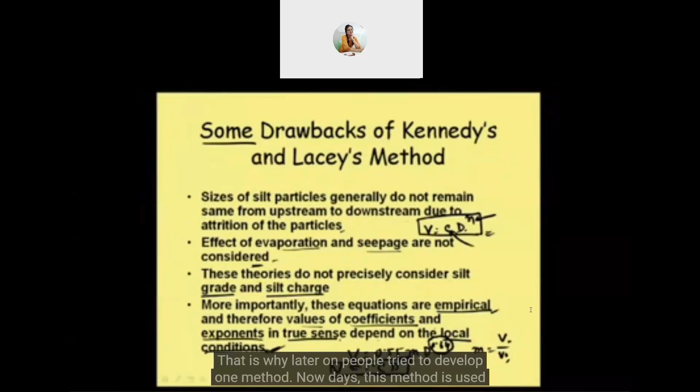Analytical basis is not there, and that's why later on people tried to develop one method, and nowadays this method is used for design of alluvial channels. In fact, the Indian code also suggests this method, that is the tractive force method of design of alluvial channel. So after covering Kennedy's and Lacey's theory of design of alluvial channel, now we'll be moving on to design of alluvial channel using the tractive force method.

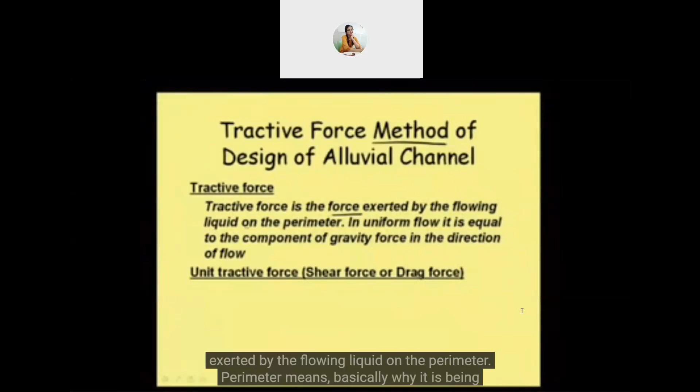Well, now we need to know what is basically tractive force. Tractive force is the force exerted by the flowing liquid on the perimeter. Why am I writing it as perimeter? Because we shouldn't say that it is exerted by the fluid only on the sediment or soil, since sometimes the perimeter may be consisting of something else, but still the flowing fluid will be exerting a force, a drag force, on the side of the channel. And if sediment or soil is there, if it is an unlined canal, that is, an alluvial channel, then the drag force will be exerted on the soil particle. So that is called tractive force.

Now, when a fluid is flowing through a channel, what is that drag force, or where does it come from? That is basically the force that is governing the flow, or the force due to which the fluid is moving. And that is nothing but the component of gravity force acting in the direction of flow. So we can say that in uniform flow, it is equal to the component of gravity force in the direction of flow. So that is what tractive force is.

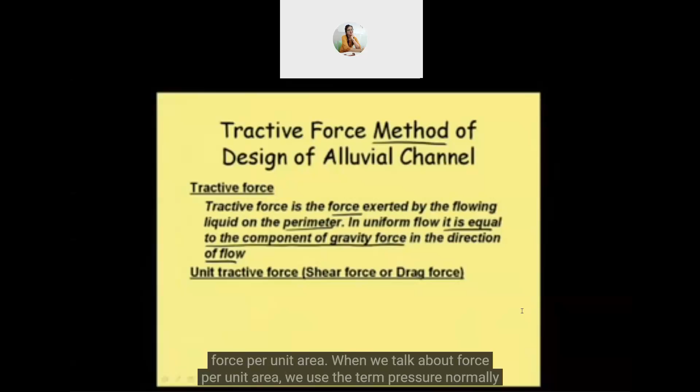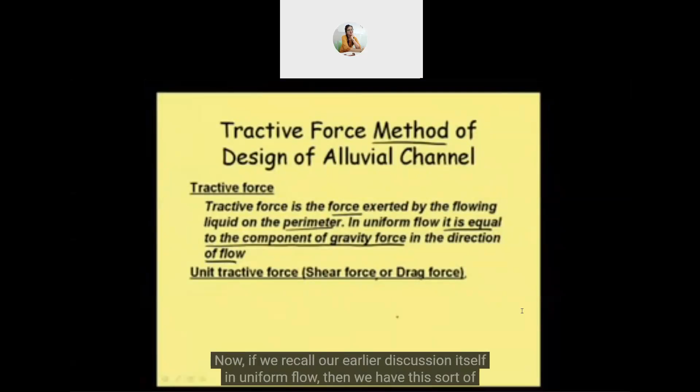But for the design purpose, or for developing the concept of design of alluvial channel by tractive force, we need to know about another term called unit tractive force, which is also called shear force or drag force. Unit tractive force means tractive force per unit area. When we talk about force per unit area, we normally use the term pressure, or stress. But in case of tractive force, the popular term used is unit tractive force, and of course we can call it shear force, or we can call it drag force also.

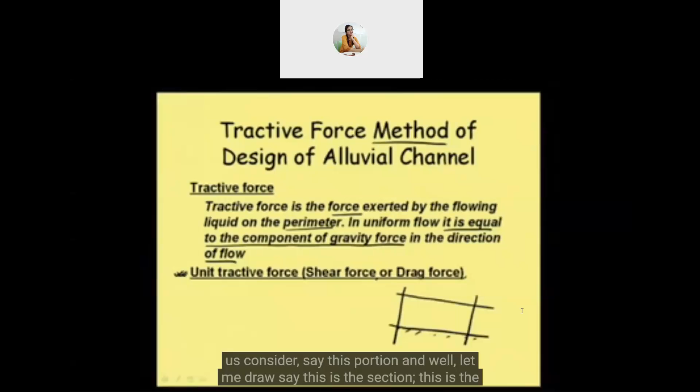Now, if we recall our earlier discussion in uniform flow, we had this sort of analysis. Say in a channel, this is the bed, and water is flowing, and let us consider this portion. Let me draw this section, and then this section, and the sectional area is this area. We are considering uniform flow, so wherever we take the section, it doesn't matter, but if the channel is non-prismatic, it is better to take the section from the central part, so that it represents both sides in a well-represented way.

Now, say this is area and this is the perimeter, the entire side length. This is the perimeter. And say the weight of this fluid is W. W means the total weight, and the unit weight of the fluid, if I write as small w, sometimes we use the term gamma also, to represent unit weight. In different books, different symbols are used, we should not get confused by these symbols; we should know the physical meaning of it. So it is the unit weight of water, and then unit weight multiplied by the volume of this fluid.

We are talking about the fluid volume between section 1 and 2. What is this volume of fluid? If the area is A, and the length of this portion is L, then the volume will be A multiplied by length, A multiplied by L. This is what gives the weight.

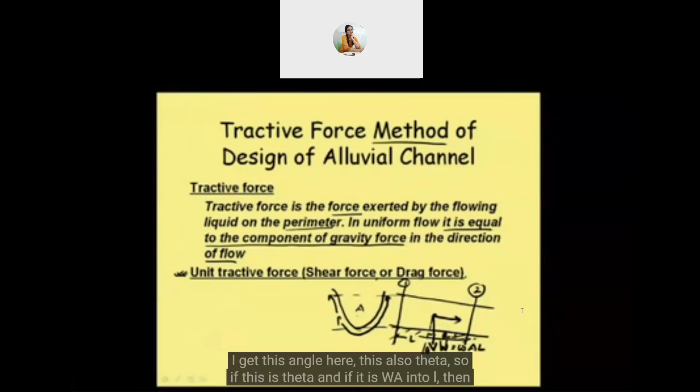So if this angle is theta and the weight is WAL, this force will be, because the flow movement is in this direction, equal to WAL into sine theta, WAL sine theta.

Now for very small values of theta, generally in canal systems in agricultural fields, when we design, these are normally not having very steep slope when we talk about plain area. The theta, because this slope always remains generally small, since we are doing this for design of alluvial channels. In alluvial channels, normally in the river valley, the slope will not be very high. But if we talk about agriculture in hills, that soil will not be alluvial, and we are not talking about design of this sort of canal there. That design concept will be different, because the soil will not be alluvial at that point.

So for small value of theta, WAL sine theta, we can write sine theta approximately equal to theta. And what is this theta? Theta is nothing but the bed slope S. So if this force is written as F, we get F equals WAL into S.

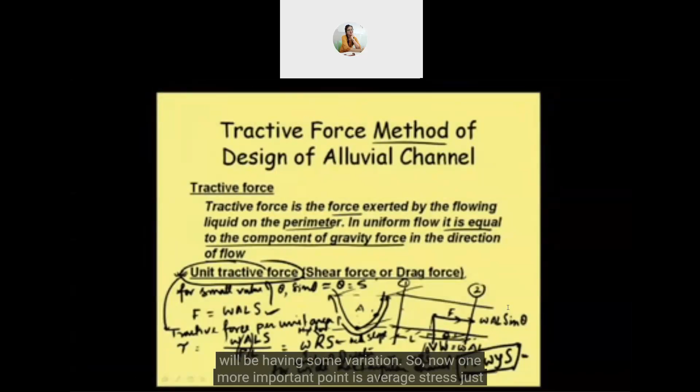Average shear stress is what we calculate, but for design purposes we should know the distribution of this shear stress, whether it is uniformly distributed over the surface or distributed in a different way. So we are talking about distribution of shear stress, which means tractive force, and tractive force per unit area, that is unit tractive force.

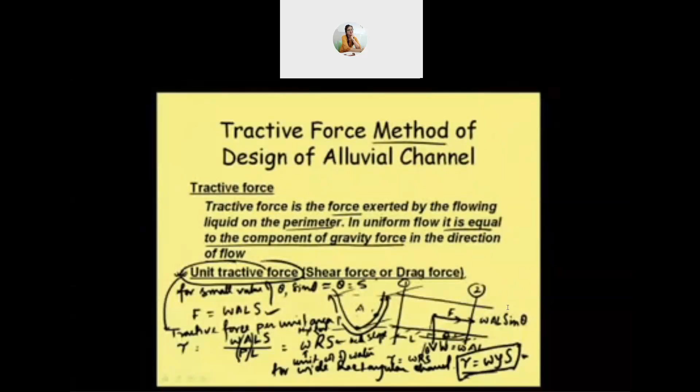So the distribution of tractive force in case of a wide channel is of course uniform. If we have a very wide channel, then using the relation tau equals WYS, we can consider it uniform everywhere.

But generally all channels are not that wide, and wide means how wide — that is the question. How wide the channel is, is obtained from the value of B by Y. For example, if the bed width is 10 meters and the depth is 0.5 meter, that can be considered wide, because B is significantly larger than depth Y. But the same 10 meter wide channel with a depth of 3 or 4 meters cannot be considered wide.

So wide does not necessarily mean only the B value; it basically depends on the B by Y ratio. B should be much larger than Y, sufficiently larger, and only in that case can we consider R equal to Y for a wide rectangular channel. Otherwise not. R, the hydraulic radius, is considered equal to the depth only when B is much larger than Y. So we should be very careful about this.

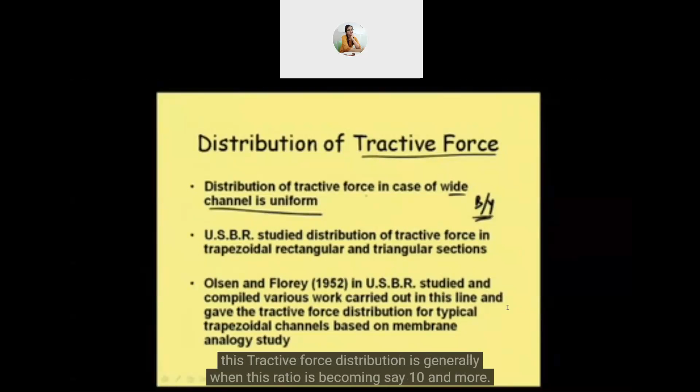If someone asks whether a 20 meter wide channel can be considered a wide rectangular channel, that is not the right question. You should ask whether the B by Y ratio is such that it can be considered a wide rectangular channel. For a wide channel, tractive force distribution is generally uniform when this ratio becomes 10 or more; in that case we can consider the tractive force distribution to be uniform.

Now, the United States Bureau of Reclamation studied the distribution of tractive force in trapezoidal, rectangular, and triangular sections. They conducted a lot of experimental study, since there is no other way to obtain this value than through experimentation. They also conducted some study using numerical techniques, but their basis was experimental, and they carried out many experiments to understand the distribution of this tractive force.

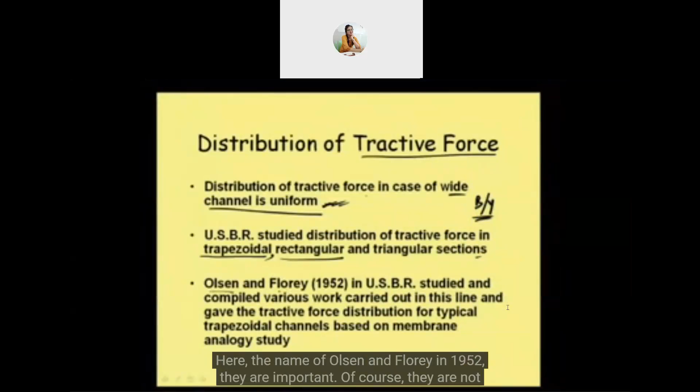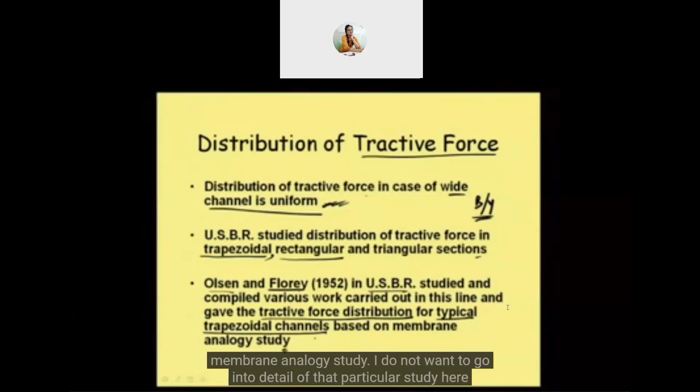The names Olsen and Florey, in 1952, are important here. Of course, they were not alone — other engineers worked along with them, and they compiled their study as well as studies conducted by other people at USBR. They gave the tractive force distribution for typical trapezoidal channels based on a membrane analogy study. I do not want to go into the detail of that study right now, but we need to know that based on their study, they gave a distribution of tractive force.

That distribution means how tractive stress will actually vary along the perimeter. So that distribution they gave, and let us see how this distribution occurred.

They did it for different types of channels, different types of trapezoidal channels. For a trapezoidal channel with side slope 1:1.5, they conducted some experiments. With side slope 1:2, they conducted some experiments. With a rectangular channel, they conducted some experiments. So like that, they conducted several experimentations. And for all those different side slopes, they again considered the B by Y ratio, which is a very important factor as we were discussing.

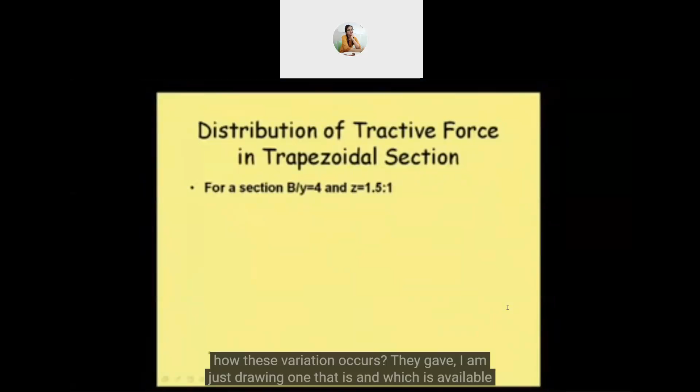So for B by Y ratio say 5, then 10, 6, 7, for different values starting from 1 up to 10, they conducted different experiments and got these values. Let us see how this variation occurs. They gave, and I am just drawing one example that is available in different books also.

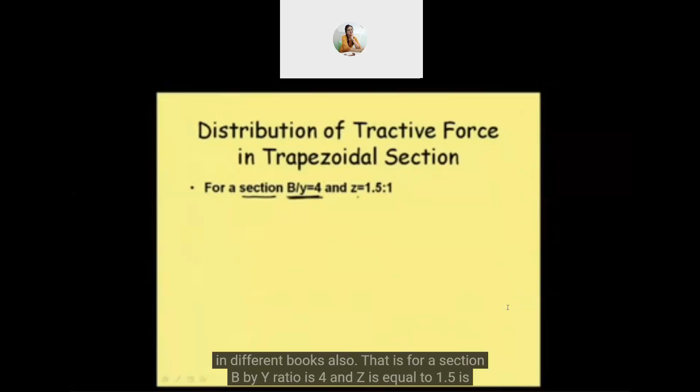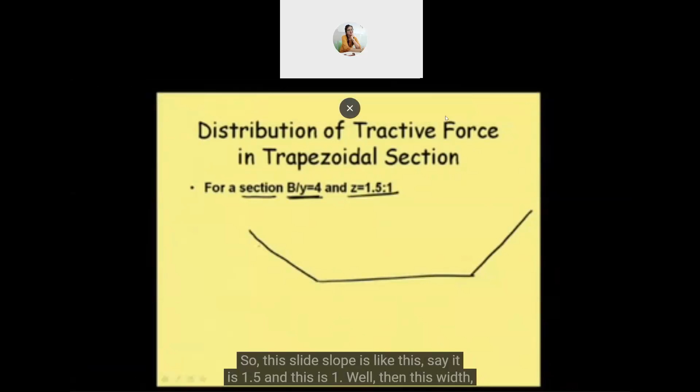That is for a section where B by Y ratio is 4 and Z is equal to 1.5:1, that is 1.5 horizontal to 1 vertical. So if we draw that channel, it is like that, with this side slope being 1.5 and this being 1.

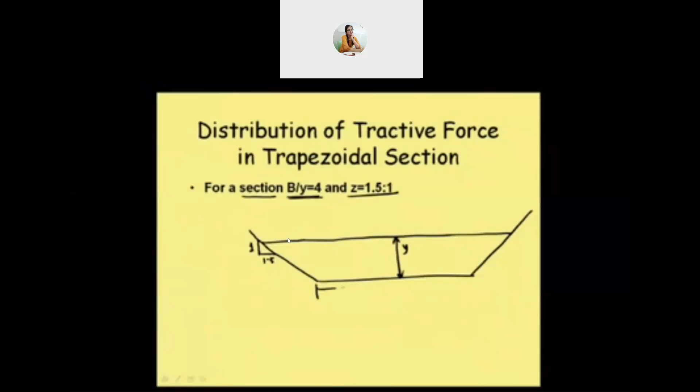If the depth is, suppose, Y, let me take the proportion accordingly since B by Y is 4. So if this depth is y, then width is equal to 4 times y. This is the bed width, and this is nothing but our actual B value. So B is equal to 4y.

So for that particular channel, if we draw the shear stress distribution, we can see that at the bed, the distribution is more or less uniform. It goes like this, more or less uniform. Let me take a different color so that it becomes more distinct. So this is the channel, and the distribution at the bed is more or less uniform.

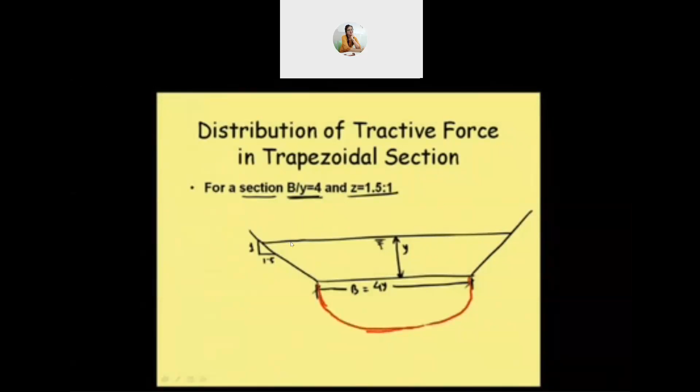And the maximum value of this particular distribution is obtained as 0.970 into WYS. Now what this means is that at every point we have a shear stress value.

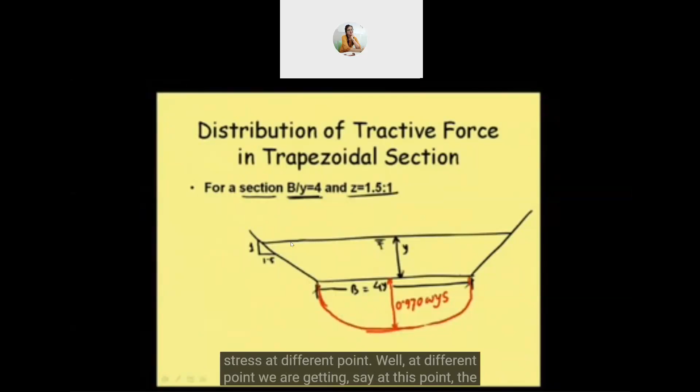We are plotting graphically the shear stress. Whatever shear stress value we get at each point, we plot it, and finally we get the graph. This is the graph of shear stress at different points. At this point the shear stress value is this much, at this point it is this much. Like that, at different points we get shear stress values, and the maximum value we get at this point is 0.970 WYS, where W means omega, the unit weight of water.

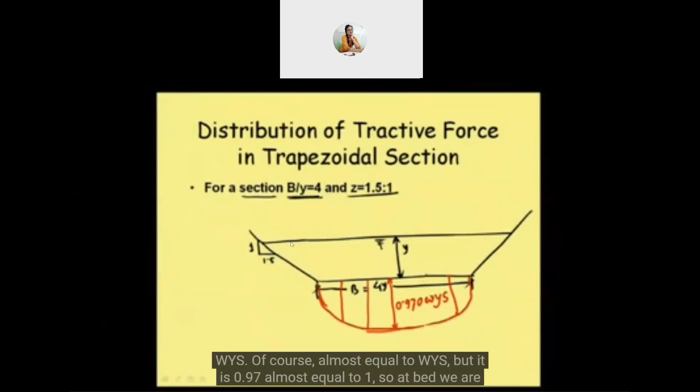Now, this distribution shows that although in our earlier analysis we were getting shear stress equal to WYS, here we are getting it as 0.970 WYS. Of course it's almost equal to WYS, 0.97 is almost equal to 1. So that is at the bed.

Now what about the side? On the side, the shear stress distribution is not like that. Obviously, on this part of the surface the depth is less, so the shear stress will also be less. But here it is increasing, and if I plot the shear stress distribution graph, it will be zero here, increase to some value, and be maximum somewhere here. So the distribution will look like this if I plot the values, with the maximum somewhere here.

And that maximum shear stress at the side is equal to 0.750 WYS, writing up to 3 decimal places. A similar distribution we will be getting on the other side also. So this is not uniform, and that value is also 0.750 WYS.

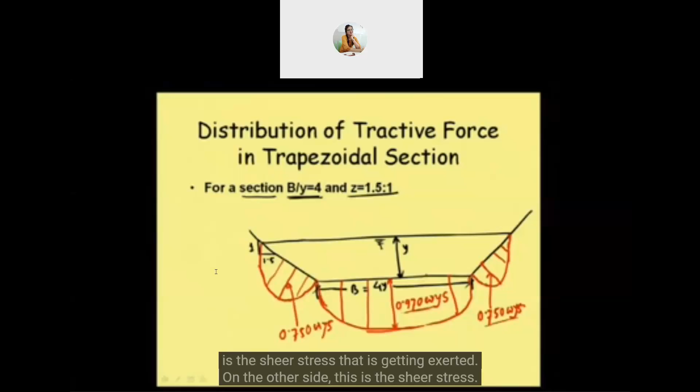Now we have some idea of how the shear stress gets distributed on the side of the channel, and for design purposes, we are concerned about the maximum shear stress to which the channel gets subjected. That is, if we need to make our channel safe, we should see that at the bed this is the shear stress exerted, and on the side, this is the shear stress to which it is being subjected.

Now, whether we will be going for this shear stress for design purpose or that shear stress, which one? Again, there is another point to consider.

Consider the bed material. When the particle is on the bed, the shear stress required to move it will be more than the shear stress required to move a particle on the side slope, because the bed particle is at rest with its submerged weight and friction, so the force must be sufficient to overcome those. On the slope, the particle's weight has a component in the direction of the slope that also helps move it, so the shear stress required for moving is less there.

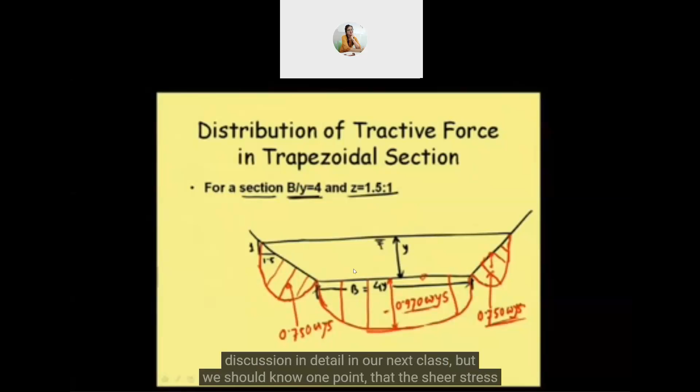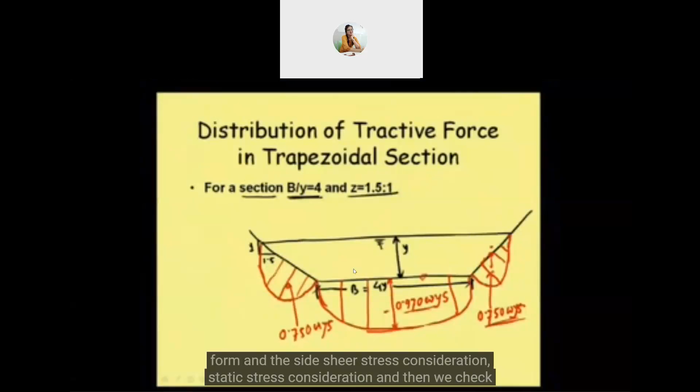We will discuss this in detail in our next class. But we should know that the shear stress required to move a particle is less on the side, and that's why initially the design starts from the side slope shear stress consideration, tractive stress consideration, and then we check whether it is safe for the bottom or not.

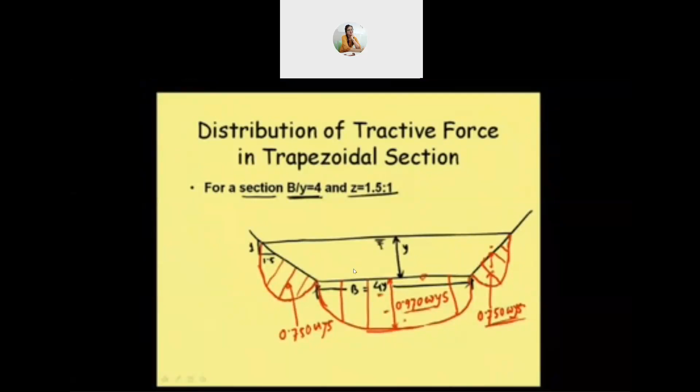Now this is what I have drawn for only one size of channel, with B by Y ratio 4:1. But the channel experiments were conducted for different ratios, and for our actual design purpose, we cannot say this one case is enough. There may be channels where, if we go for a very large B by Y ratio, it may not be the channel we require, and it may be quite large for our required section.

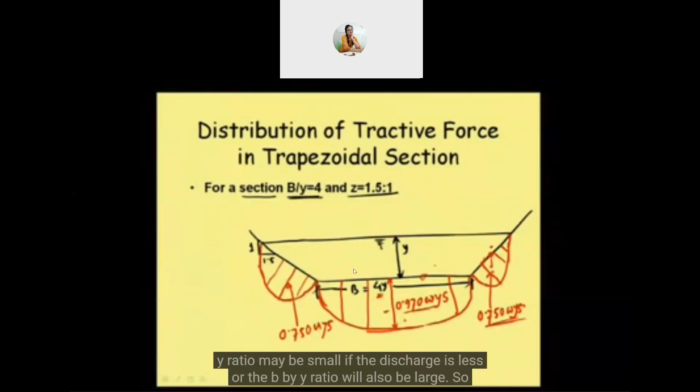So depending on the discharge that needs to be carried, our B by Y ratio may be small. If the discharge is large, our B by Y ratio will also be large. So that way, finally, this...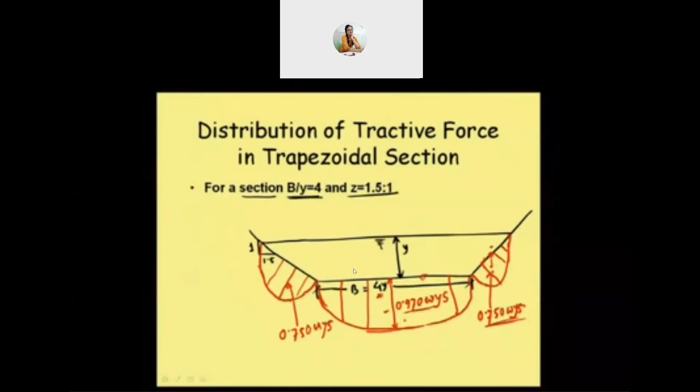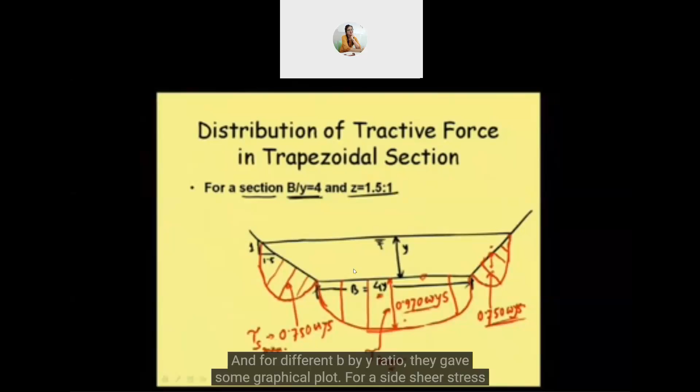USBR, here I am showing the distribution. We write this as tau S maximum, the maximum shear stress at the side, and this as tau B max, the maximum out of all bed stresses. For different B by Y ratios, they gave graphical plots for both the side shear stress and the bed shear stress, across all these different B by Y ratios.

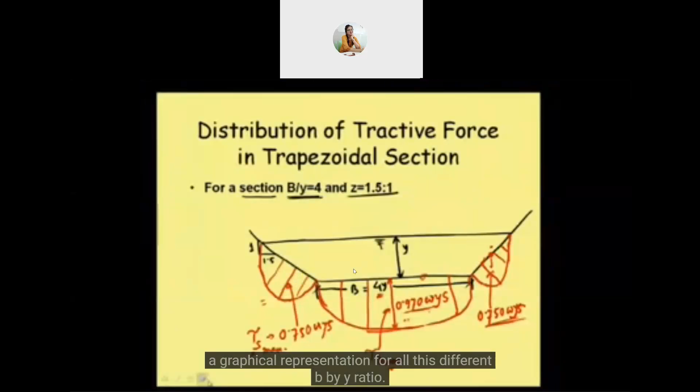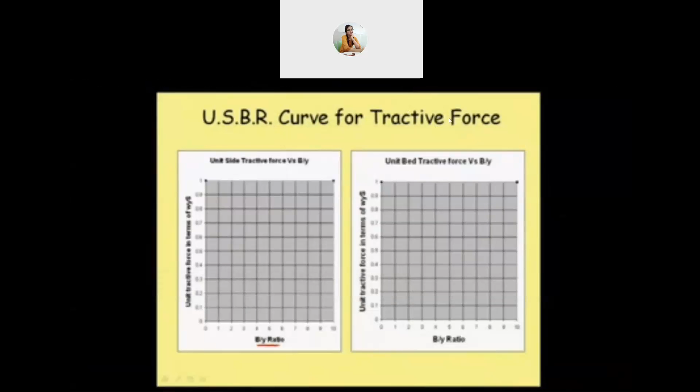The format of the graph is like this. These are popularly known as USBR curves for tractive force analysis. They plotted B by Y ratio on the x-axis, and on the y-axis they gave unit tractive force in terms of W Y S. That means this value, suppose it is 0.6, for a particular B by Y ratio of 2, if we have the curve...

We are not having that curve here. In the next class, we will draw those curves, show how they come about, and then see how these curves help us get the value of side tractive force. Suppose for a B by Y ratio of 2, we get a point here - this will indicate that the shear stress at the side will be, say, 0.6 W Y S.

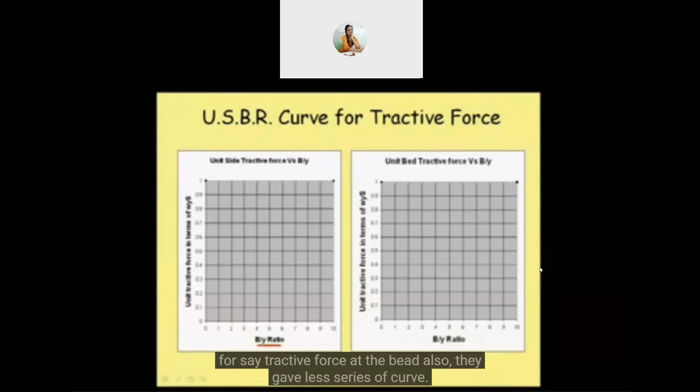Similarly, for tractive force at the bed, they gave a series of curves. Using those curves, we can get the tractive force for different sizes of channel and for different side slopes, since a channel may have different B by Y ratio as well as different side slope. With these curves, for those different side slopes and B by Y ratios, we will be able to get our unit tractive force, and based on that value, we will be able to design.

Of course, what is required is the permissible tractive stress. What we are getting is the tractive force exerted by the flowing fluid, but we need to know how much tractive force the channel material can bear - that is called permissible tractive force, unit tractive force. We will discuss that, and based on it, how the channel can be designed using the tractive force method, including the design steps, in the next class.